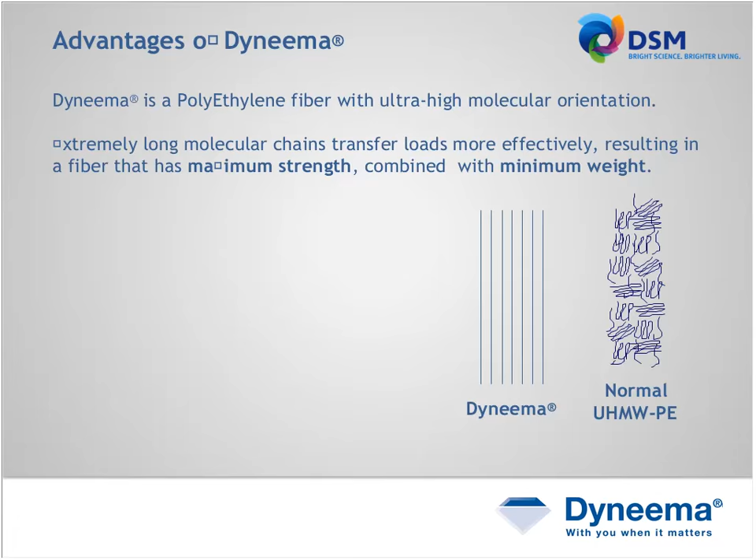Dyneema, high modulus polyethylene fiber, is one of the simplest polymers from a chemical standpoint, but it's also one of the most challenging polymers to produce into a high-strength fiber. DSM Dyneema is the inventor and manufacturer of Dyneema fiber, which was first produced in the 1960s by Albert Pennings. This was done in the lab scale, and this was the first fiber made using the gel spinning process that uses an innovative method to produce a high-strength polymer.

It was 1982 that the first Dyneema was produced commercially in the Netherlands, and it is also produced in Japan with a joint venture with Toyobo, and DSM Dyneema opened our production facility in Greenville, North Carolina in 2002.

In this slide, we can see a graph of the strength versus elongation of Dyneema compared with several other fibers and materials that are used to make high-strength ropes and cables. The y-axis shows the strength-to-weight ratio and the load applied. As you can see, Dyneema is a strong choice.

The image on the right shows an artist's interpretation of a concept known as free breaking length, and that is the point at which a cable made with a certain material will break under its own weight. As we can see, the suspended cable with Dyneema can go upwards of 400 kilometers, whereas steel wire has very strong strength, but is very heavy and has a free breaking length of only 25 kilometers. In water, this difference is much greater because Dyneema is so light that it actually floats on water.

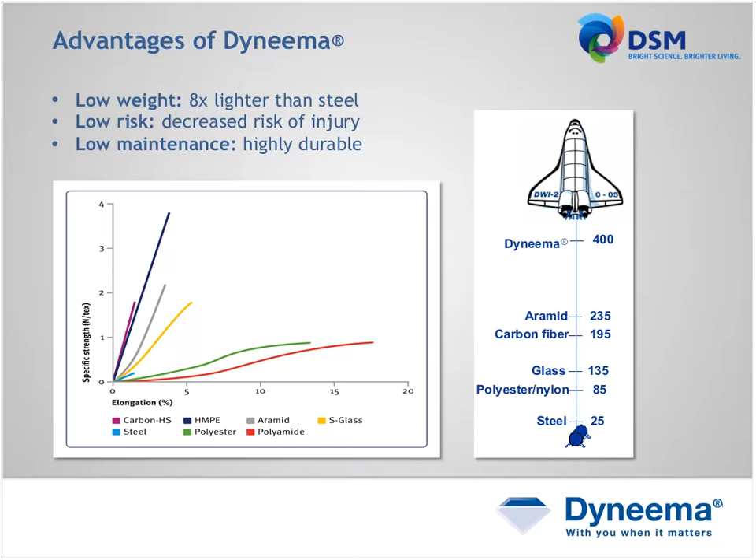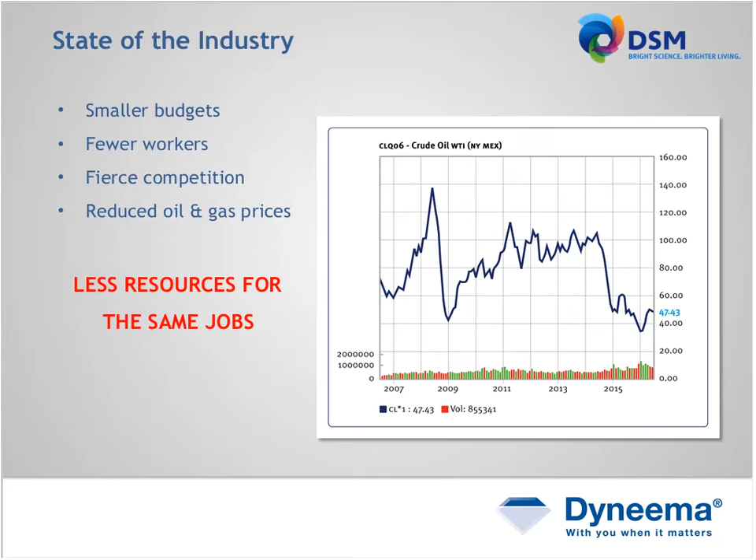These benefits are very important in this day of challenging business conditions. We're faced with smaller budgets, less people, fewer resources, but we still have to deliver at the end of the day, and doing so generates a lot of challenges that can be solved with lightweight synthetic ropes. While we focus on a broad arrangement of applications in today's presentation, one theme that goes through this entire presentation is the total cost of ownership.

Although synthetic fiber ropes can be more expensive than steel wire, over the lifetime of the product you can have reduced operational costs. Today we're going to talk about reducing operational costs, which is, of course, going to drive right down to the bottom line. We're going to talk about increased productivity, which means we can do the same job with fewer people, or we can do the same job faster.

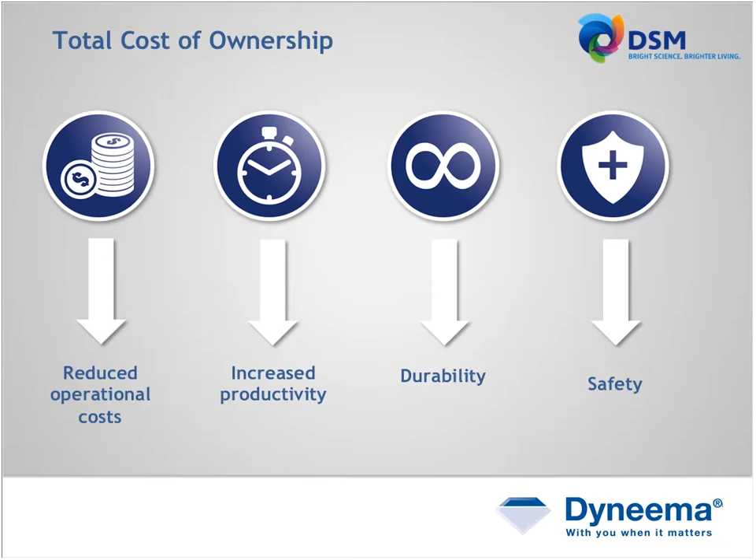Durability speaks to the lifetime of a product. And safety, of course, is something that's very important and very personal for all of us that are trying to get our jobs done.

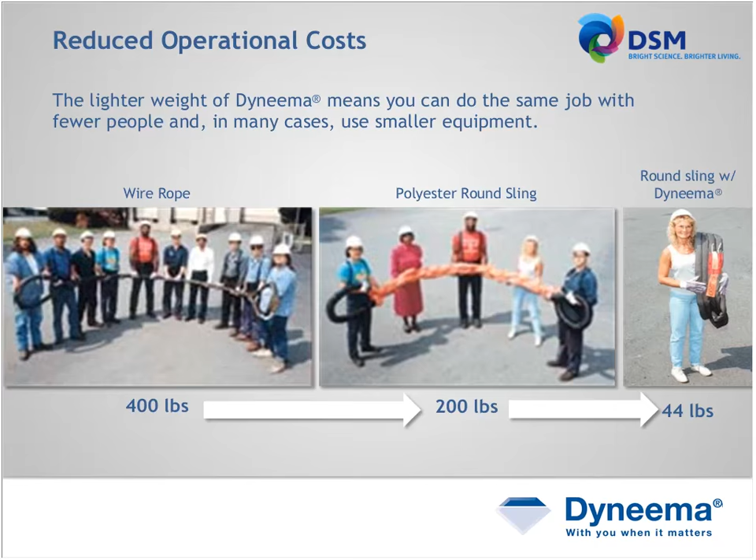One way that operational costs can be reduced is by doing more with less manpower. In this slide, we can see a comparison between wire rope slings, polyester round slings, and a round sling made with Dyneema fiber. Each person is holding about 44 pounds worth of sling, but we can see it takes a lot more people to get the same job done. This translates into reduced costs and being able to get the job done faster.

As mentioned earlier, the TLP tow-out was a great example of using Dyneema to increase operational efficiency and reduce employee exposure to potential safety hazards, all equaling reduced operational costs. Partnering with Samson's largest fabricating distributor, SWAS, who are based in Houston, Samson engineered and supplied tow lines for the 8-tug inshore tow, handoff, and 4-tug offshore tow of the platform. The end result was a safely delivered platform with significant time savings and improved productivity.

One of the things we are stressing in this presentation today is the total cost of ownership. This is not something that we're just talking about in the abstract, and we have developed models in many different types of applications in order to show that the total cost during the lifetime of a product is reduced even though the initial cost is higher. We can see the bottom bars in these two graphs show the initial cost, which has Dyneema being as much as 2 times that of steel wire.

However, due to the lifetime of the product, the speed with which you can be setting up the rigging, and the reduced amount of damage to the load, such as coils, where the steel wire rope or chain slings can be damaging a load, we reduce the chance of insurance claims.

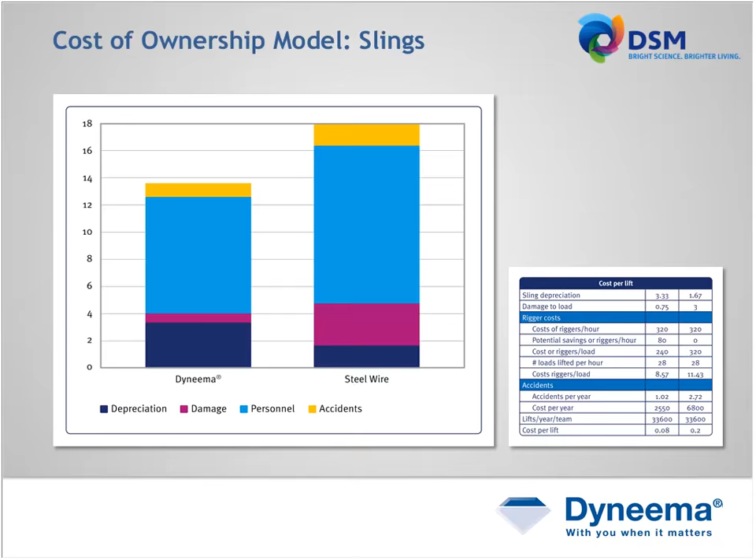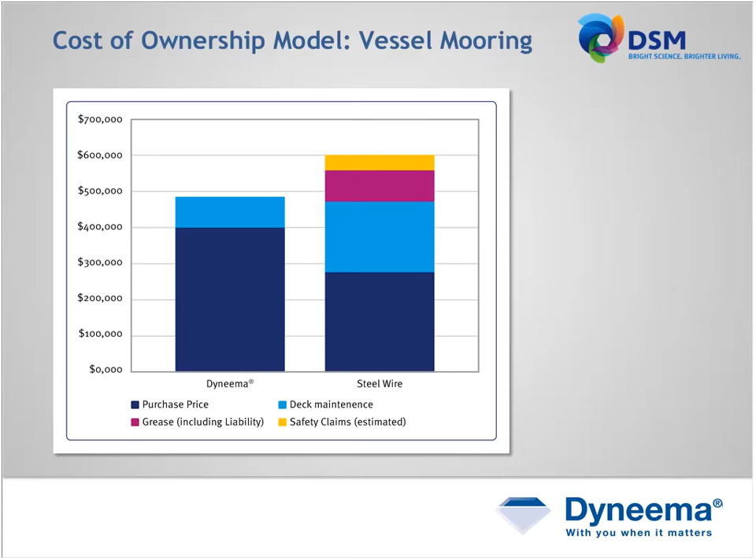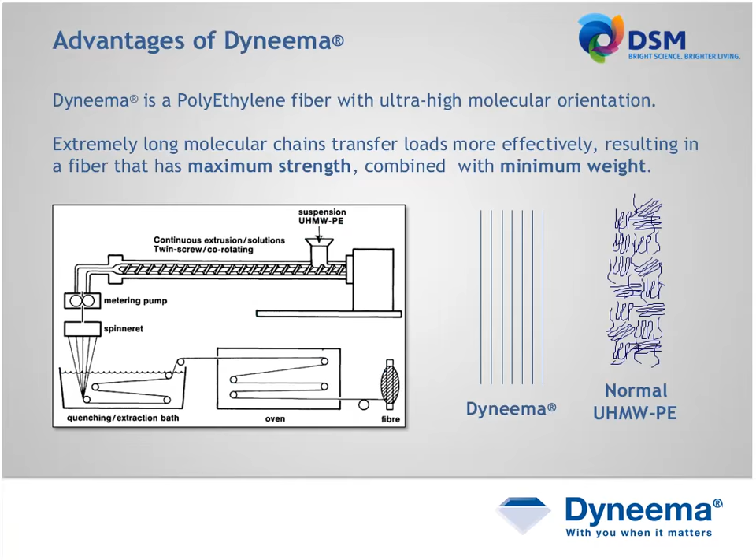That's an excellent question. I mentioned during the durability slide that DSM has innovated some new grades. One of these grades is our XBO fiber. The XBO is an overlay finish. It's added to the Dyneema fiber at the fiber level, and then that provides a raw material for rope makers to make bend-enhanced ropes. One of the benefits of this type of coating is during heave compensation, there's a reduction in temperature rise, which increases the life. And I guess I'll let you take anything from there, Justin.

Yeah, on top of that, the proprietary coatings provided by Samson on the ropes that we utilize help to minimize that heat generation from cyclical bending. The temperatures that start to affect HMPE are actually quite high, and through extensive testing that we've done, it takes quite a long time to be stuck in heave compensation mode in those exact same areas of the rope going over that bending for it to really materially affect the strength of the HMPE.